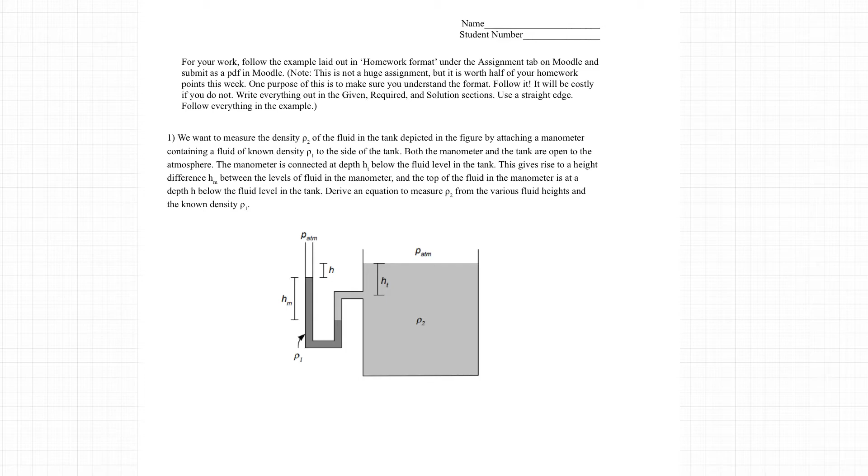All right, here we are, and we're going to go ahead and do homework 4. We want to measure the density of the fluid.

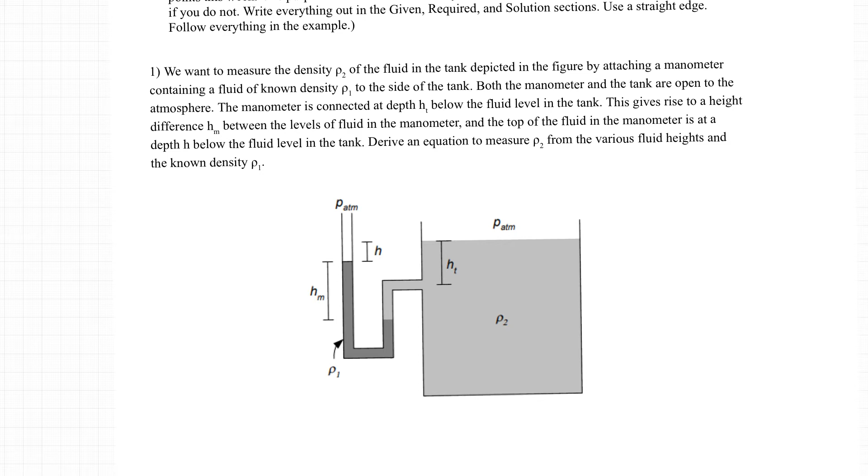And by the way, if it'll make you feel all big and bad and cool, I got this problem from an MIT thing, okay? And again, as I always say, we teach you the same things at UNO that you learn at MIT or Berkeley or Stanford or Michigan or University of Texas or wherever, and you can get as good an education as you want as long as you don't cheat.

Okay, so I know this because I taught this course at Berkeley. So, well, I co-taught. I was the TA, or what they call the GSI. But...

Anyway, so we want to measure the density, rho 2, of this fluid over here. Okay, so this is what we're looking for right here, depicted in the figure by attaching a manometer containing a fluid of known density, rho 1. So this is the known. Both the manometer and the tank are open to the atmosphere. And then we've got all this geometry.

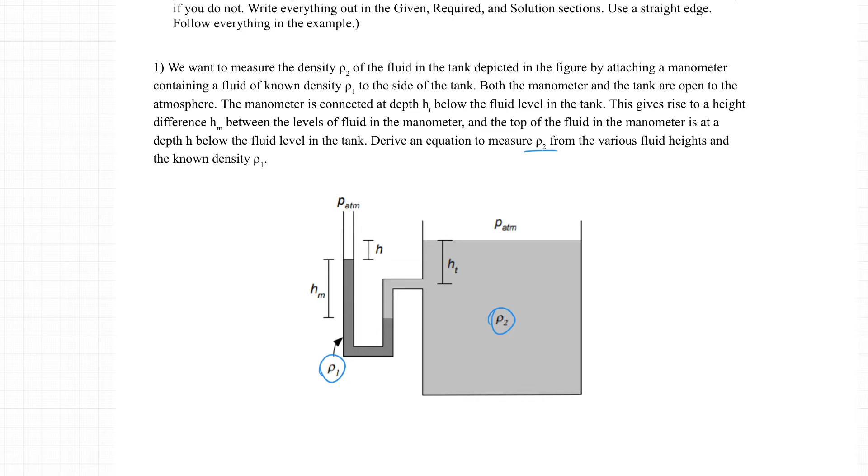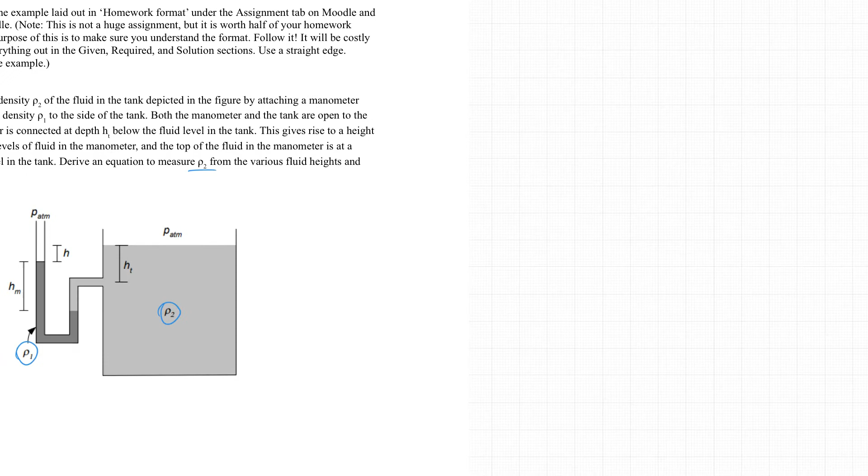Okay, so what we're going to do here is we're going to derive an equation, blah blah blah, for rho 2. So I'm going to do a given, required, and solution, and I'm going to do it all over here to the right. Okay, so again, I'm going to use a straight edge here because I want to prove that it doesn't take that long, okay?

Because a lot of you just aren't doing it, and it's like, I don't want to draw a picture. Okay, well, we're going to start at 130, maybe 145, but we're going to use a straight edge, and you're like, I don't have a straight edge. Well, I'm going to use my UNO ID. Okay, you can use your driver's license or a UNO ID or anything like that. I'm sorry, there's a trash truck outside.

Anyway, so what we're going to do is we're going to do the givens, and we're going to do this all properly. Okay, so we're going to start at 150. And we'll time how long it takes to do this with a straight edge. Okay, so we've got this manometer...

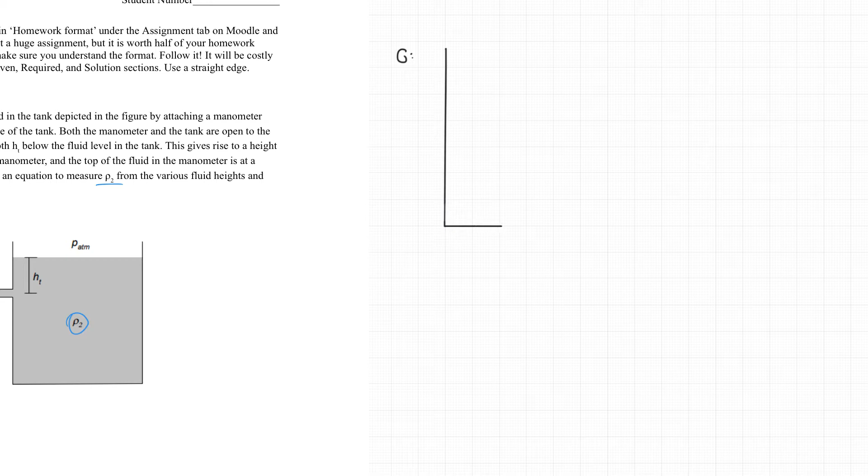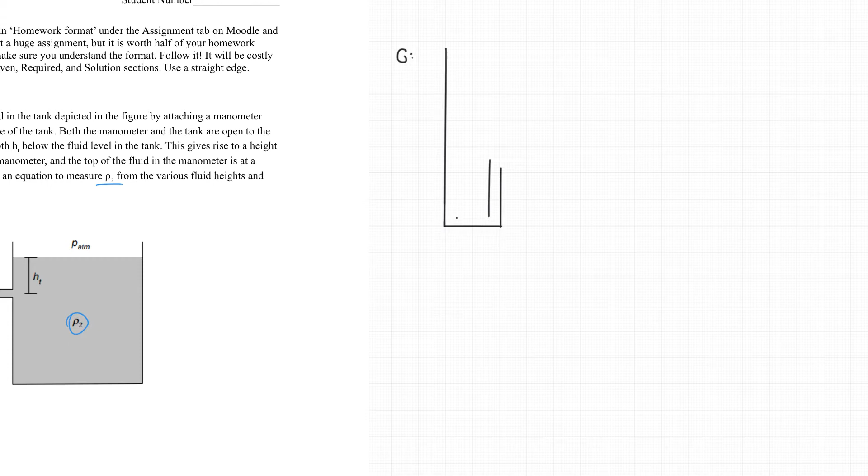And it's not necessary to smack your lips while doing this, but sometimes I do. Okay, and let's see, so we're kind of keeping track of what's going on over here. And it doesn't have to be perfect, but we want it to be good, right? You want to turn into something that you're proud of.

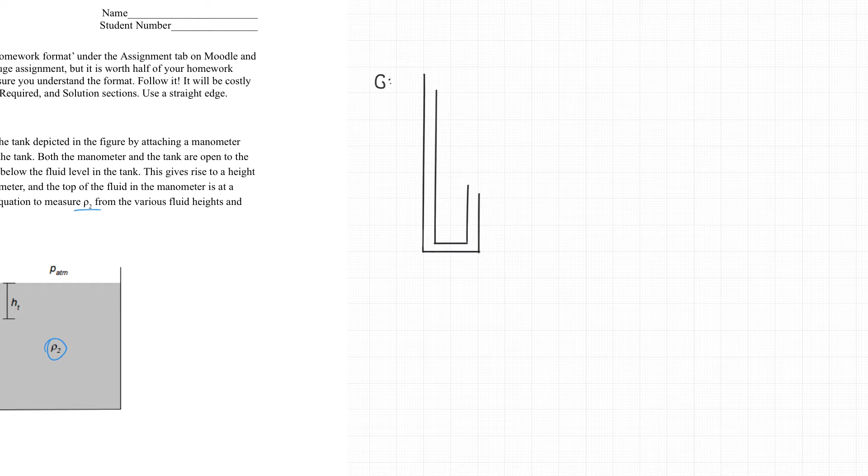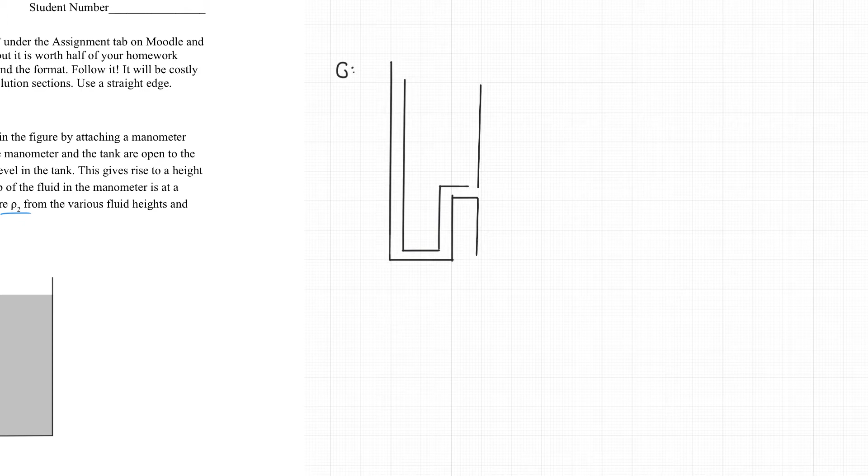And this should be the case for all of your engineering classes. Maybe not perfect, and some of you guys are much more perfect than I am, and I'm always really happy to see it. And if you're doing this right with a pencil, then you can erase things and make it pretty darn perfect. Okay, if you're doing it on a tablet, you can also erase perfectly, which is super cool, right? And I'm sure that I might have to do that, right?

So you can see what we're drawing here. It's not going to take very long. And maybe we'll clean it up with an eraser if we need to. Unfortunately, my tablet eraser is a little bit finicky. It does not always want to do what I want it to do. So anyway, so there you go.

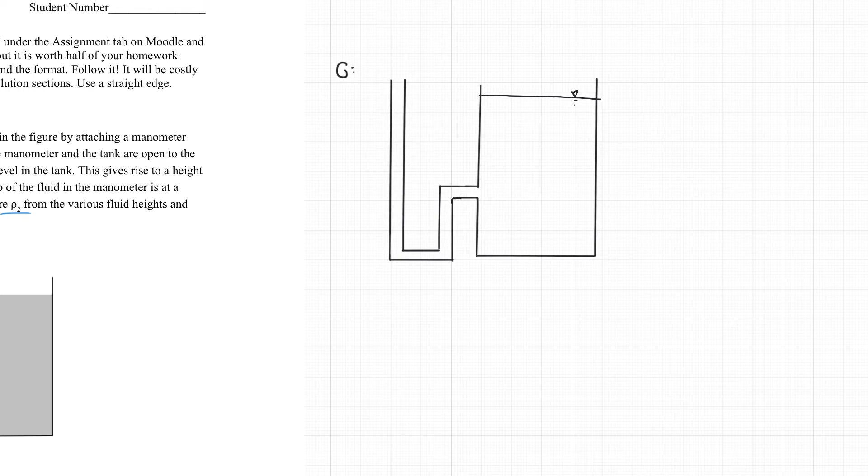And so what we have, again, I don't usually like to draw the surface of the fluid with a straight edge, just because the surface moves around and stuff, right? So, but anyway, so here we go. Okay, and we've got 2 free surfaces here, and we've got a height. We've got this edge right here, somewhere down here. So the coolest thing you can do here, the best thing you can do, is if you have colors, is to use them, right? You don't need a straight edge for these, right? But that is that's rho 1, okay, because that's fluid 1.

Okay, and then this is going to be rho 2 over here. Okay, and it's like, well, you got the colors, might as well use them, right? On my key, you won't see colors because I did it all in pencil, right? But I did use the tick marks in different directions. Okay, now we've got some distances and things, right?

So I kind of like dotted lines here, like that, and I like a dotted line here. Okay, and then again, what is that distance? Well, let's see, what do they call it? They call that H. Okay, and they call this one going down to here...

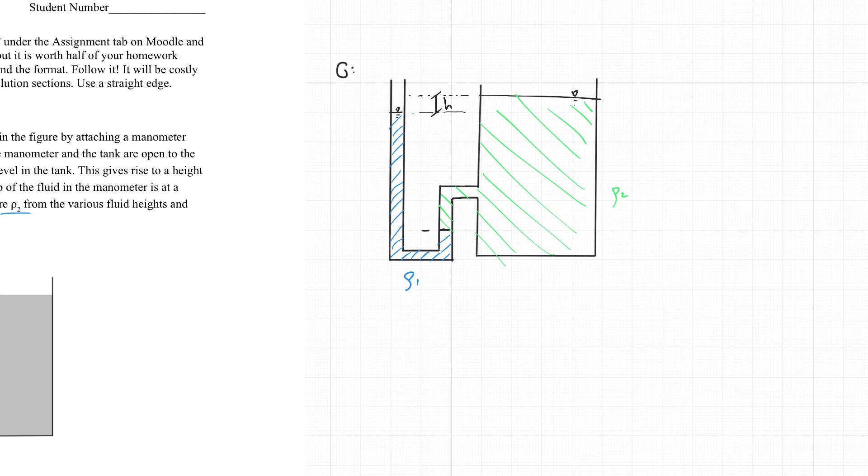HM, which makes me think that this unknown liquid might be supposed to be mercury, right? 'Cause I don't know why they call it H. Oh, height of the manometer. Sorry. It's almost even obvious.

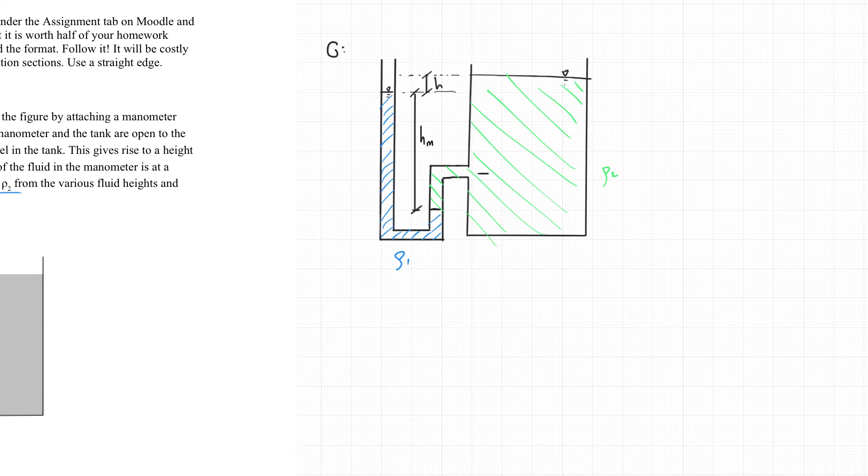Okay, and then there's an H sub T, which I find to be an interesting one, which is the distance down to this opening, right? And we will wonder, among other things, does that distance matter? Okay.

And the answer is, it doesn't matter. What's interesting is, as we go through this, it doesn't matter where this opening is. What matters is the distance from the surface of the water, or the green liquid, to the bottom of the green liquid. That distance matters. Anyway, that's what's given.

Notice, would that take me 3 minutes? Not too long. Okay, required.

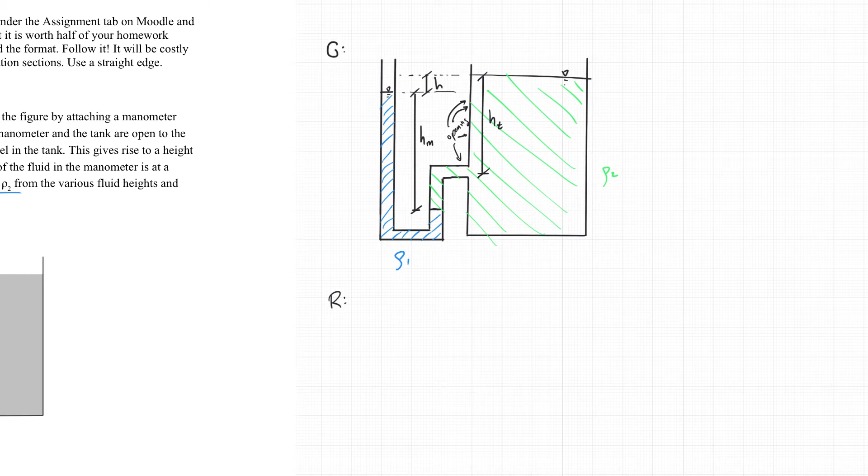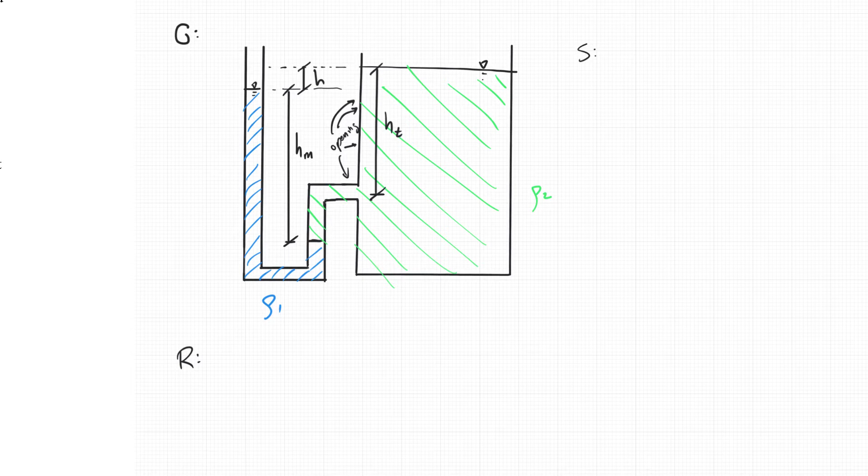We want to know, using what we have here, and I'll solve it over here so we can keep everything on one page. What we want to know is rho 2. We're looking for an expression for rho 2, as a function of rho 1 and any heights we might have. So h, hm, and ht, where ht is height of the tank, hm is height of the manometer, and h is just some difference in heights. Anything else given, but I think those are all the givens. So we're just going to go ahead and do like that.

And that equals what? We're going to solve this by working through the fluids. The nice thing about hydrostatic law, and this works with all manometers, is we're just going to walk around. I'm going to use red to keep track, and we're going to start here. I'm going to call this point 1, and this point 2, just because.

So I'm going to start at point 1, the pressure at 1, and then go down until I'm right here. So that means I went down in the fluid. I'm going to add, and that's going to be gamma 1 times whatever that height is, so that's h sub m. Now I'm going to move from there to here, and that's moving horizontal, so that doesn't matter.

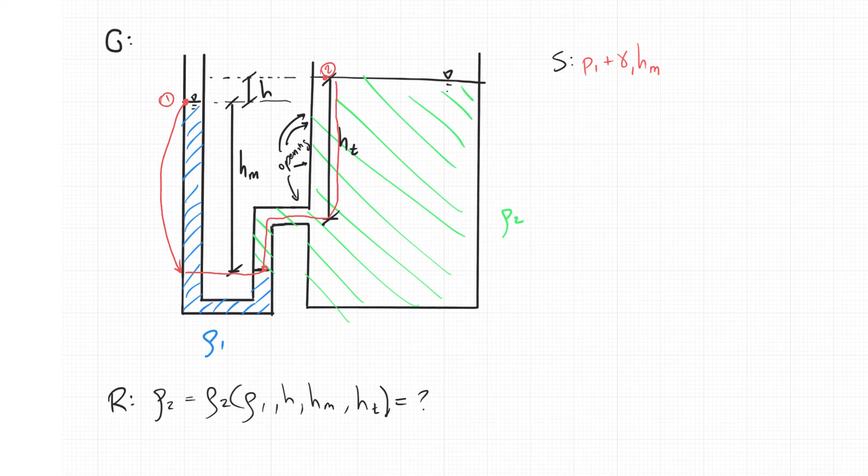Now I'm going to move back upwards in the fluid, from here up to here, and the horizontal doesn't matter, then up here. I'm going to do it as if it was all one movement from here to there, because the sideways doesn't matter. So I'll go minus gamma 2, times whatever that distance is, and that distance is hm plus h. That gets me to the pressure at point 2, equals P2.

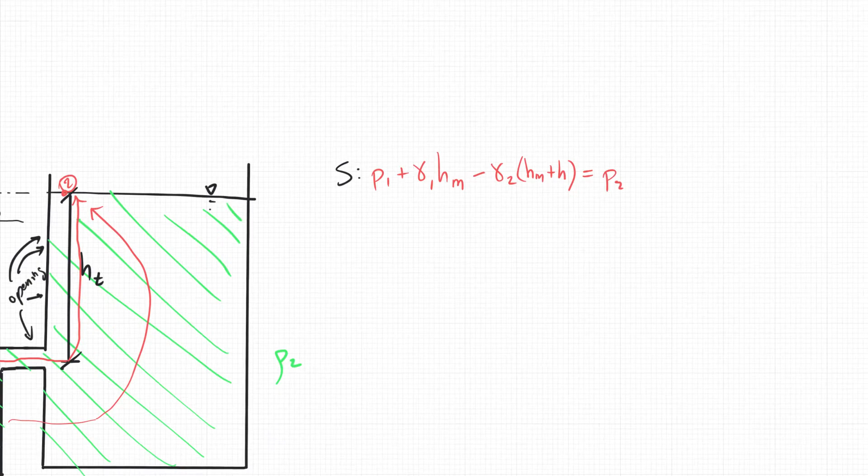Now we're ready, now we're cooking with gas. The only last thing we want to do before we solve this all the way, which I'm going to do in black because working in red bothers me, is note that P1 and P2 are both on the surface, so these are both atmospheric. So this one is P atm, this one is P atm. And I'm looking to solve for rho 2, so rho 2 is buried in here.

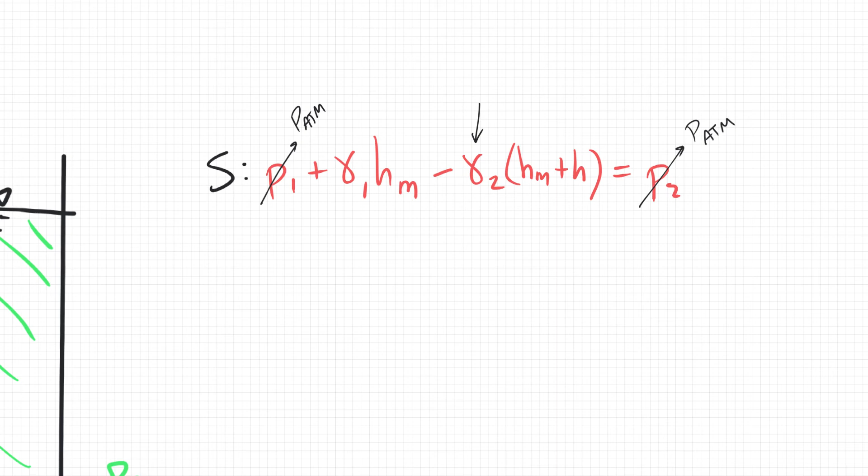So again, what's interesting here is it doesn't matter if I do gauge or absolute, because the atmospheric pressure is the same either way. So I subtract that from both sides, and it just goes away. I'm left with rho 1, gamma 1, which can be written as rho 1 G H sub m, minus gamma 2, which is rho 2 G times H sub m plus H, equals 0. Those G's are going to cancel.

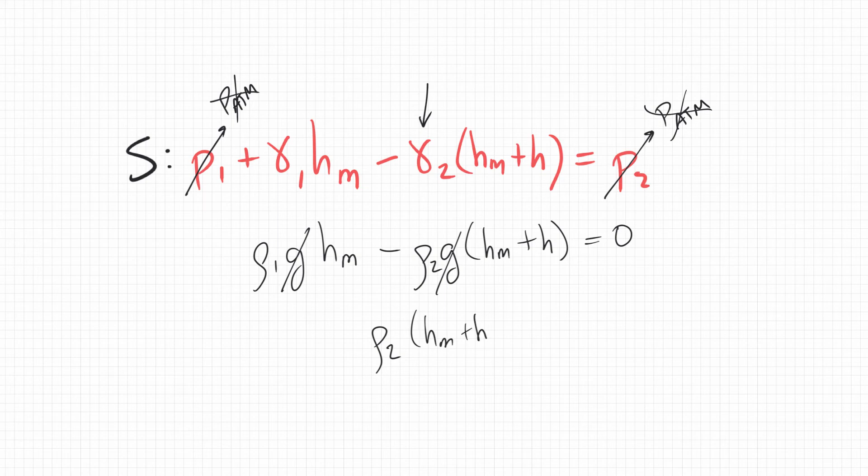I'm left with, let's see here, trying to solve for rho 2. So I'll bring it over to the other side, and I'll say rho 2 times hm plus h equals rho 1 times h sub m. Then we solve this, and rho 2 equals rho 1 h sub m over h sub m plus h. We notice the units work out here because this is length over length, so it has no units, and then this has units of density, this has units of density.

So we're good. And I wish I had boxed it before I started drawing arrows all over the place. But that's it. Now, the other thing I want to note before we completely go away from this is if you look at this question right here, or really if we wanted to put the G's back in.

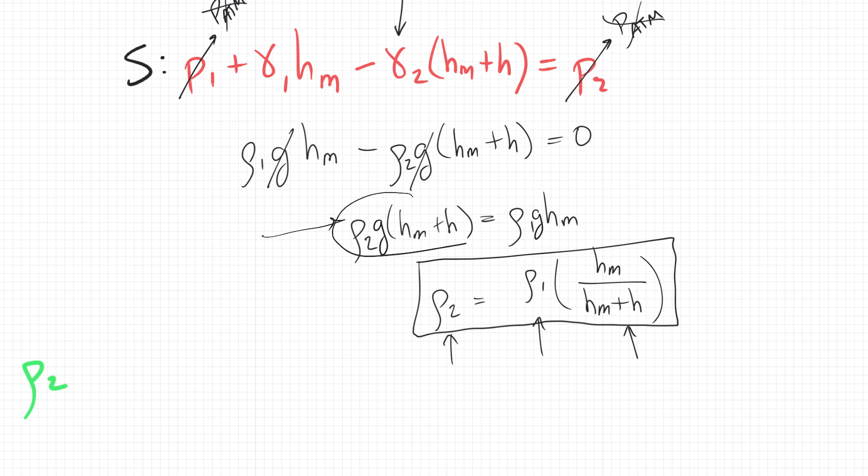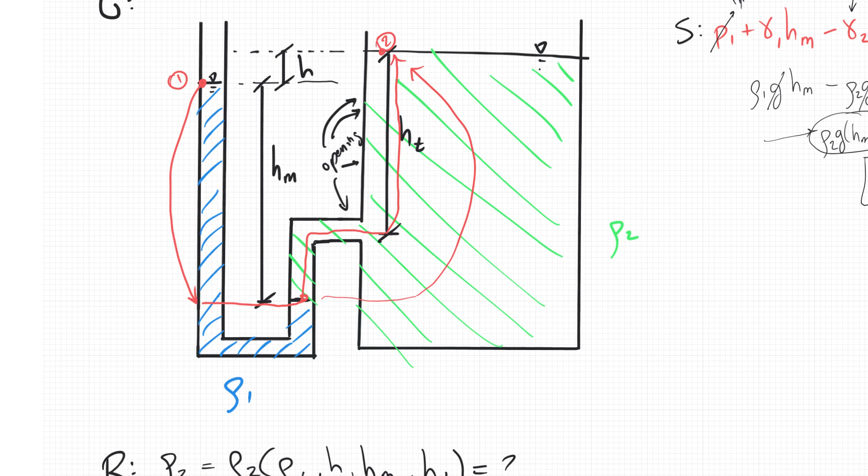Then what we've got is this is a pressure, and this is a pressure. And rho 2 G times HM plus H, where does that go? Let's see here, rho 2, so that's this density over here, times H plus HM. So that is the pressure, if I go straight down, that's the pressure right here, from this side. So that's basically the pressure pushing right here.

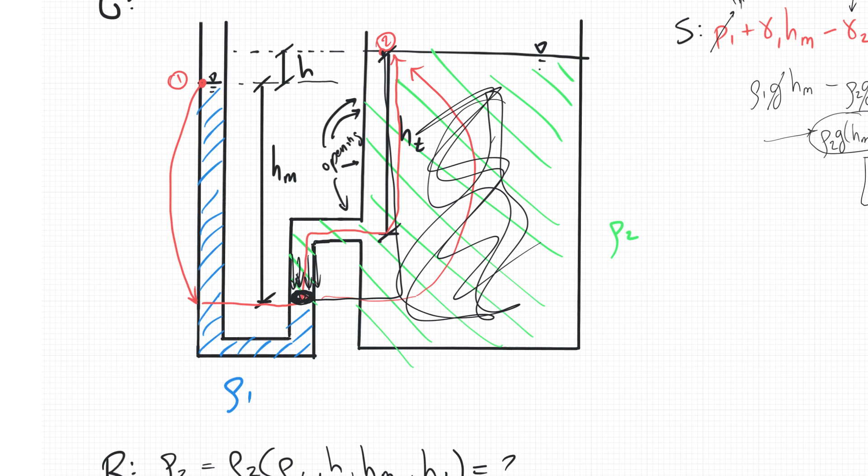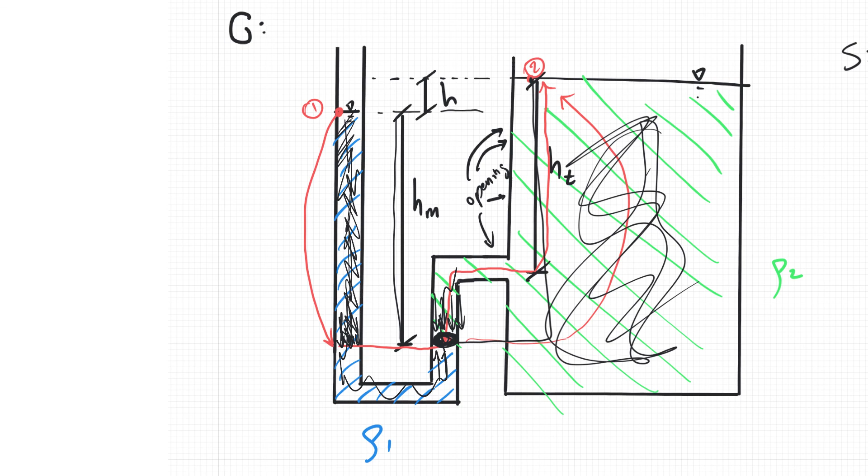Now the other side of the equation, rho 1 G HM, here rho 1 is all of this stuff, G HM, so this is this distance right here. So that is the pressure right here, pushing down right here. And incidentally, it's also the pressure pushing up right here, because it's at the same depth.

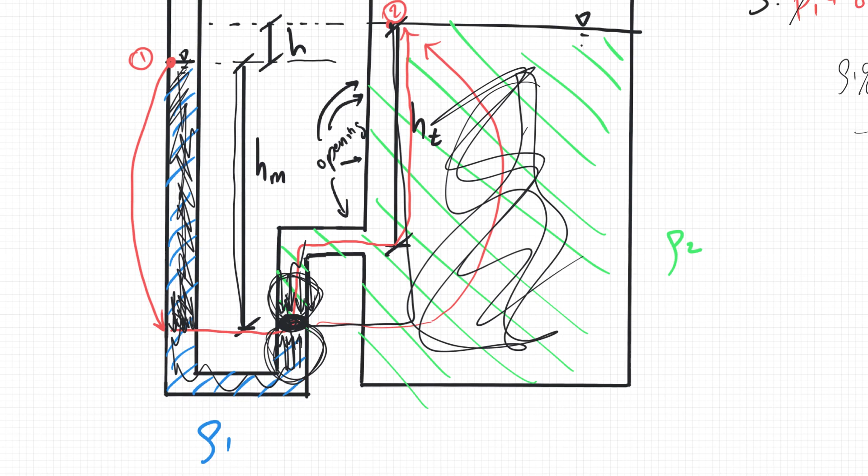So basically what that equation says is what's pushing down right here has to equal what's pushing up right here, or else it's going to move, it's going to accelerate. And that's why it's called hydrostatics. So this is your solution.